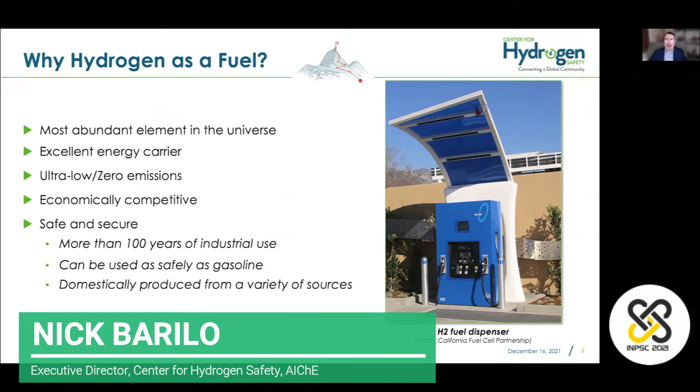So why hydrogen as a fuel? It's the most abundant element in the universe. It's an excellent energy carrier, can offer zero emissions, is economically competitive, and has been used for nearly a century safely. It's a clean and flexible energy carrier with many diverse sources and diverse applications.

Here you can see some of the applications on the right in blue. Most of those are the legacy applications. The newer fueling applications that we're seeing are up in the upper right in the green text. We can also get hydrogen from a number of diverse sources, including those you see on the left.

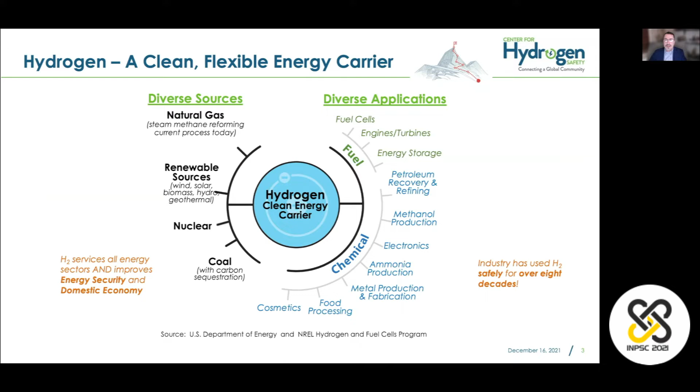There has been a huge growth in hydrogen over the last few years. You can see the graph on the lower left there relative to Google Trends and the trends that have occurred around the term hydrogen. Some of the applications you see shown here are things like heavy-duty trucking, fuel cell electric vehicles, transportation in other areas such as planes and trains, stationary and mobile applications. Many diverse applications are arising for hydrogen's use as a fuel.

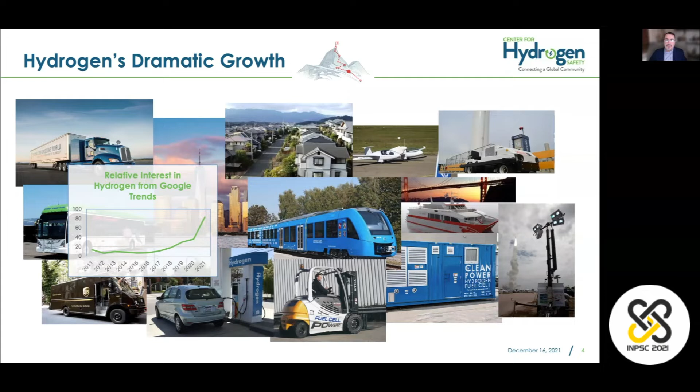The global projections you see from the Hydrogen Council on this screen. This is investments across the value chain, over 500 billion scheduled by 2030, and the US just announced another 10 billion. 359 projects going on worldwide.

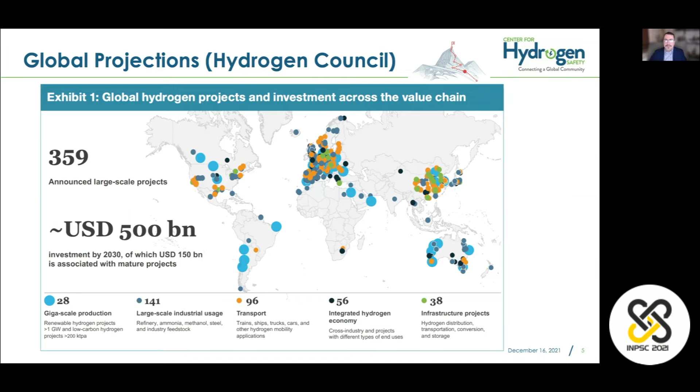Let's take a look at some of the properties of hydrogen. It's colorless, odorless, tasteless. It's a flammable gas, non-irritating, non-toxic, can be an asphyxiant. It's non-corrosive, can embrittle some materials. It is buoyant and rises rapidly. It's 14 times lighter than air.

The potential hazards include fire and explosion hazards, pressure hazards from both storage and explosion, low temperature hazards in its liquid form, and I mentioned embrittlement and asphyxiation. The energy content of 1 gallon of gasoline is approximately equivalent to 1 kilogram of hydrogen.

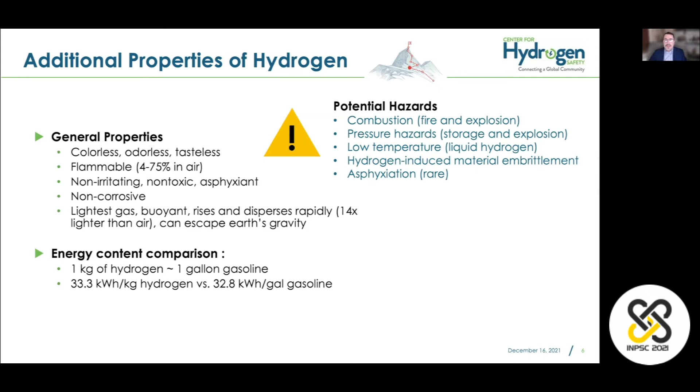In comparing hydrogen to other fuels, you see natural gas and gasoline here. Hydrogen has approximately 3 times more energy by weight, but by volume is 4 times less than that of gasoline. It is also odorless. Natural gas has a mercaptan, very difficult to do with hydrogen, as hydrogen is the lightest molecule and wants to move up and away quickly. Keeping an odorant with it is very difficult. The other problem is odorants can tend to contaminate the fuel cells.

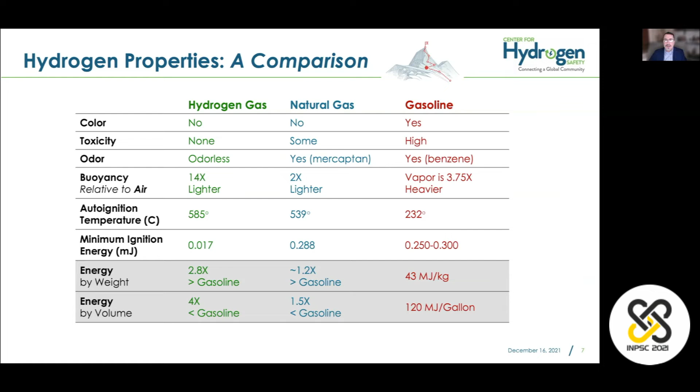So what's the state of hydrogen safety currently? Well, we know with all industries, safety issues can be a deal breaker and must be addressed successfully for technology acceptance and deployment. The good news with hydrogen is it has a stable foundation, almost a century being used safely with lots of good knowledge and best practices. However, its use as a fuel is new to many who may lack the expertise or experience to do it well. And some have misconceptions and may not know what they don't know.

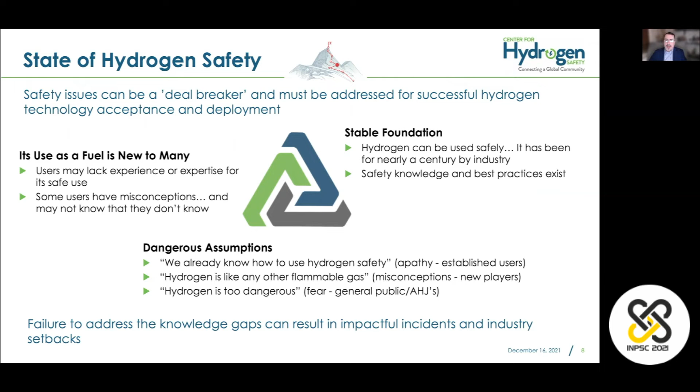So some of these dangerous assumptions we see here at the bottom are ones that we've come across, things like apathy, misconceptions, and fear, and hydrogen is too dangerous. We've certainly heard that through the media.

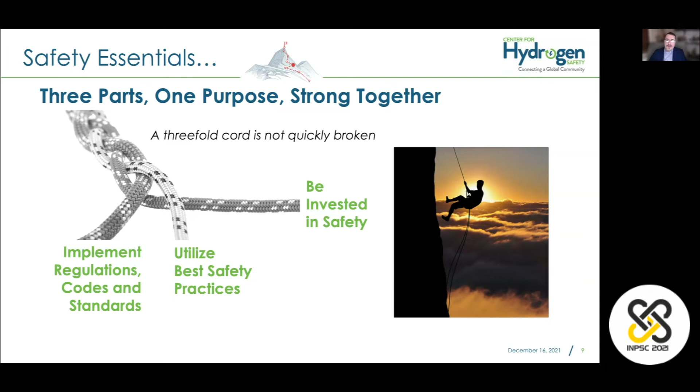The safety essentials of hydrogen include 3 parts: implementing regulations, codes, and standards, utilizing best safety practices, and investing in safety, otherwise known as having a safety culture. These 3 are very important to ensure that we have long-term success.

Regulations, codes, and standards, fairly obvious. These provide the needed information to safely build, maintain, and operate the systems, provide some uniformity of safety requirements, help safety officials and others approve the work, and bolster public confidence.

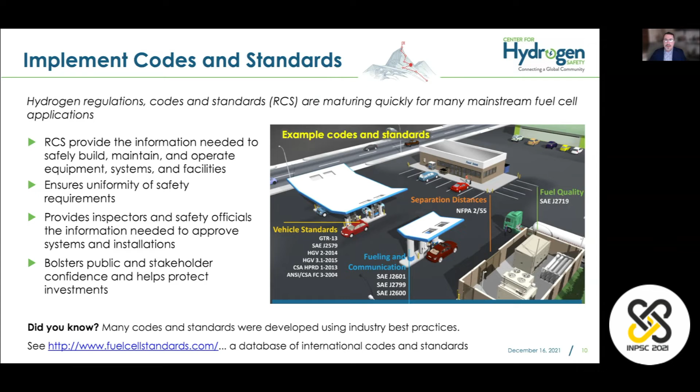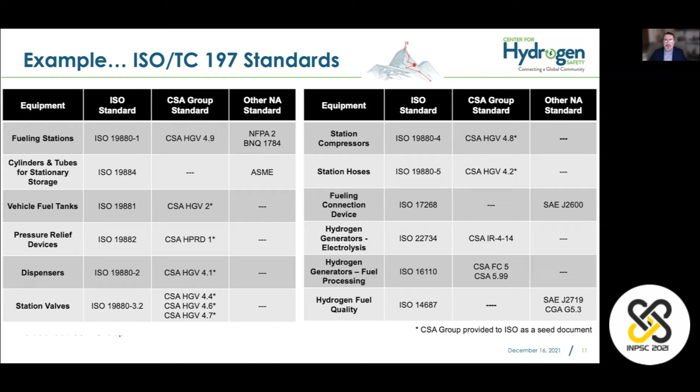Here are some examples in the international realm of hydrogen codes and standards. This is taken from CSA and includes some ISO standards, CSA standards, and other standards such as NFPA 2. Best safety practices: it's a technique or methodology that has reliably led to a desired result over time.

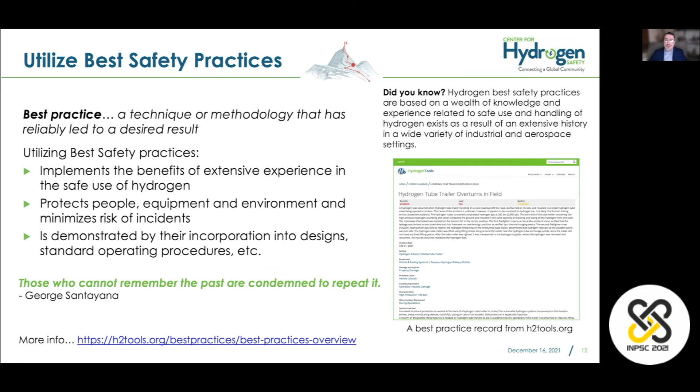When utilizing best safety practices, we implement the benefits of extensive experience. We protect people, equipment, and the environment and minimize the risk of incidents. And it's demonstrated through their incorporation into designs, standard operating procedures, et cetera. Really, it goes to learn. If we don't remember the past, we're condemned to repeat it, and best safety practices help us to avoid that.

Being invested in safety is also very important. Having a safety culture that is not just about compliance, but commitment. It's directly impacted by your organization's beliefs, perceptions, and values. It's critical for sustaining a legacy for your organization and its impact in reaching goals, as well as ensuring long-term acceptance of the hydrogen industry. Again, it must be demonstrated. It's a culture of safety.

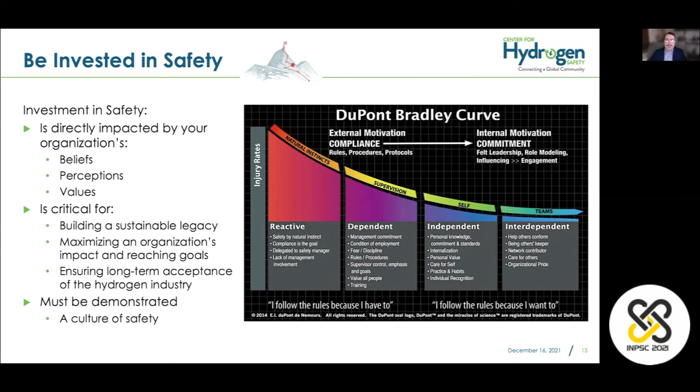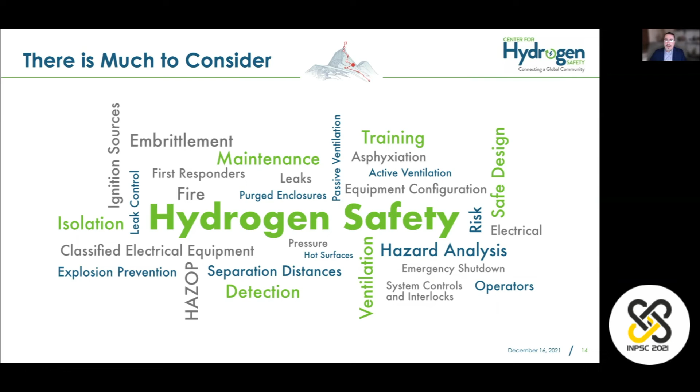That alone, there are many, many things to consider with hydrogen safety. You see some terms here, certainly quite a few things to take into account when you are designing or planning on operating hydrogen equipment. What happens when we don't navigate this well? Here are 3 examples of incidents that have affected the industries that they're in.

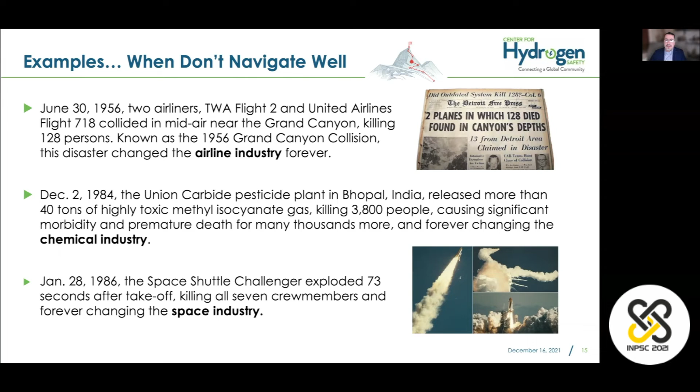There was an airline collision in the United States in 1956 that forever changed the airline industry. Certainly in 1986, we saw the United States Space Shuttle Challenger explode, and that changed the space industry. Those of you in India will forever remember the Union Carbide incident that occurred with 3,800 people perishing, that affected the chemical industry and had substantial changes.

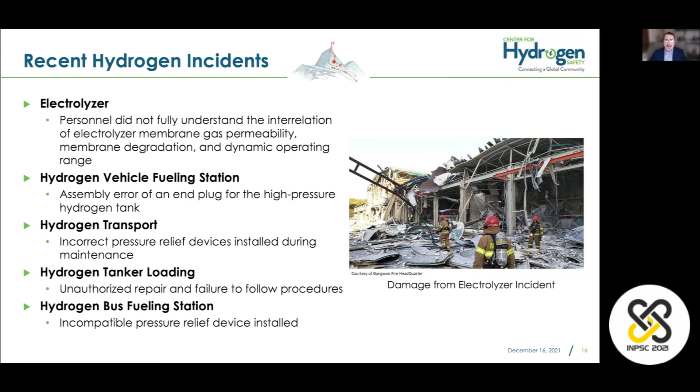Hydrogen is not immune to this. We have some recent incidents from the hydrogen sector, and what you'll see in these incidents here is that there's a common thread. Human error was applicable in most of these incidents and led to some significant impacts. An electrolyzer incident is pictured on the right. That was $30 million in damage and 2 fatalities.

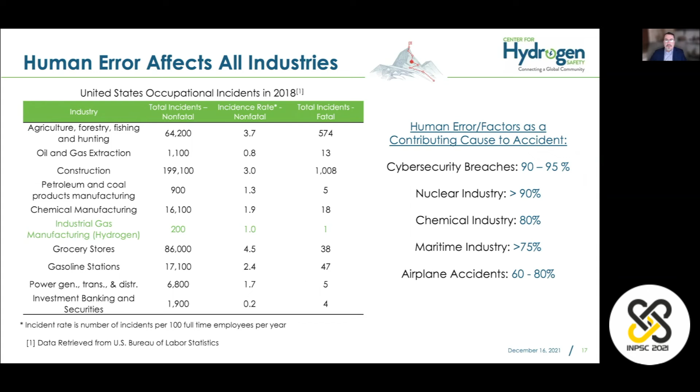Human errors affect all industries, though. It's not just the hydrogen industry. Here you see some numbers, try to put it into perspective. But it is something that we have to handle appropriately in order to ensure the industry is successful.

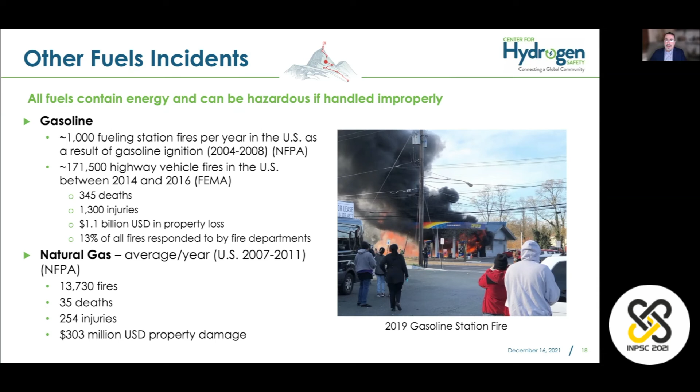Just in case you're wondering, there are other fuel incidents that have occurred. So all fuels contain energy and can be hazardous if handled improperly. Here are some stats from gasoline and natural gas. You can see the numbers here that suggest that we have grown accustomed to these sort of incidents and sort of immune to seeing them occur. We won't be as fortunate as we get started in a new, nascent industry such as hydrogen.

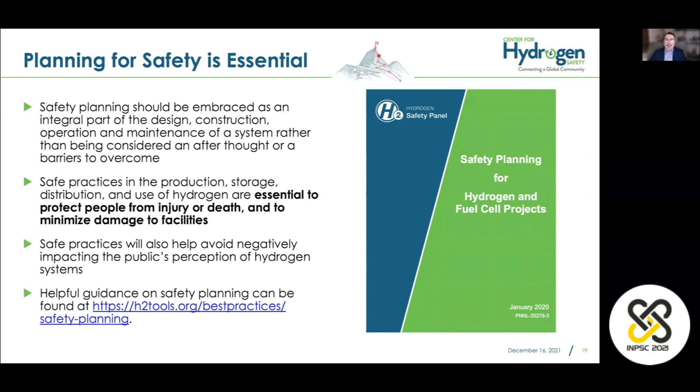So really important, planning for safety is essential. It should be embraced as part of the design, construction, and operation process. It's essential to protect people from injury or death and to minimize damage to facilities, and will help avoid negatively impacting the public's perception of hydrogen and fuel cell technologies. Some guidance is shown here that is available for free download.

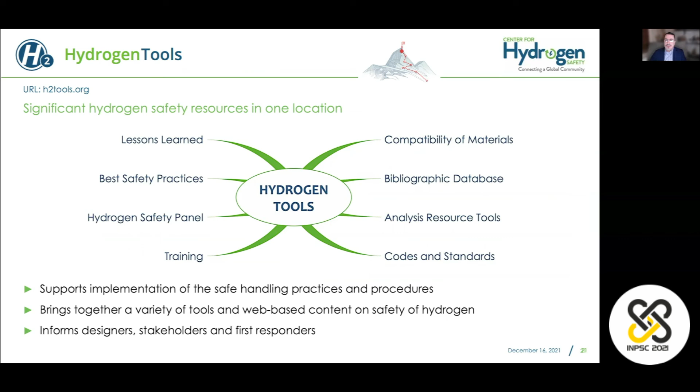Some other tools that can help you navigate to safety: the Hydrogen Tools portal, as well as the Center for Hydrogen Safety. The portal is a location which combines many resources into one usable interface. Currently, it's seeing more than 20,000 sessions a month worldwide, so it is indeed a global resource, and you can see some of those capabilities there on the screen.

The Center for Hydrogen Safety is an international nonprofit that was set up to help gather and disseminate best safety practices and lessons learned worldwide. It is supporting applied safety in both the industrial sector as well as the new energy transition. And it provides a common communication platform and a global scope to ensure that information, guidance, and expertise is available to all stakeholders.

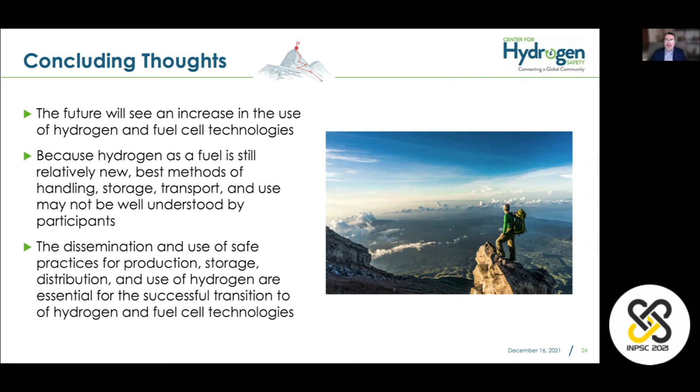So some concluding thoughts: the future will certainly see an increase in the use of hydrogen and fuel cell technology. Because it's still new as a fuel, the best methods for handling, storing, transporting, and using it may not be well understood by the participants. And the dissemination and use of safe practices for the production, storage, distribution, and use of hydrogen are essential for a successful transition to hydrogen and fuel cell technologies.